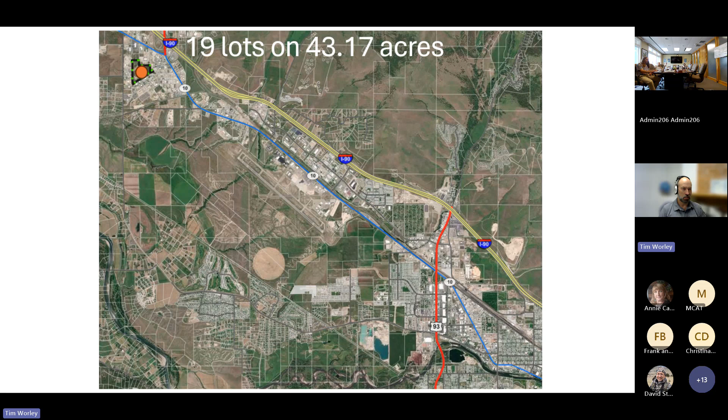All right, this is Grass Valley Industrial Subdivision. I'm Tim Worley with Planning, Development, and Sustainability. This is a 19-lot industrial subdivision proposal by Ethos Civil, representing Grass Valley Industrial Park, LLC. The subdivision is located in the Y. It's a 43-acre parcel, a 19-lot industrial subdivision, proposed in 2 phases. The zoning out here is Industrial Center Light, which includes light industrial, artisan, and limited commercial activities.

Some of the activities that you see out here at the Y in this general vicinity include warehousing, tool manufacturing, recycling, and fabrication. I'm going to go through the typical subdivision review criteria, starting with agriculture. This parcel did have somewhat of an agricultural history. The Y interchange began construction in the early 1970s, and since that time, this location's become increasingly light industrial in nature. This property has no surface water rights at present, and it's surrounded by light industrial and commercial uses.

There's a network of public and private roads in this location, kind of a mix. The proposal is to extend 2 roads and create 1 new road. All roads meet the 26-foot wide industrial standard. Moccasin Lane is one road that will be extended. Moccasin actually connects all the way out to Deschamps Lane, and this will provide a connection to Enterprise Way.

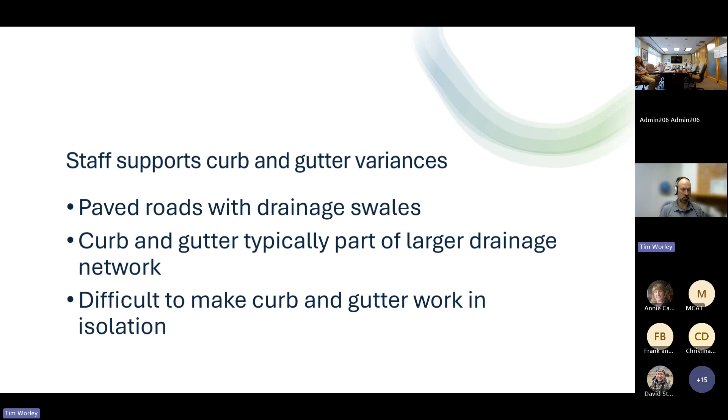Staff supports the curb and gutter variances. Curb and gutter are typically part of a larger drainage network, which is lacking in this general area. We felt it was difficult to make curb and gutter work in isolation. Now, Planning Board, in weighing in on these 4 variances, actually had a split vote, basically a 3-3 vote, which is a no recommendation vote, essentially. Their concern was that this was setting up substandard urban area infrastructure.

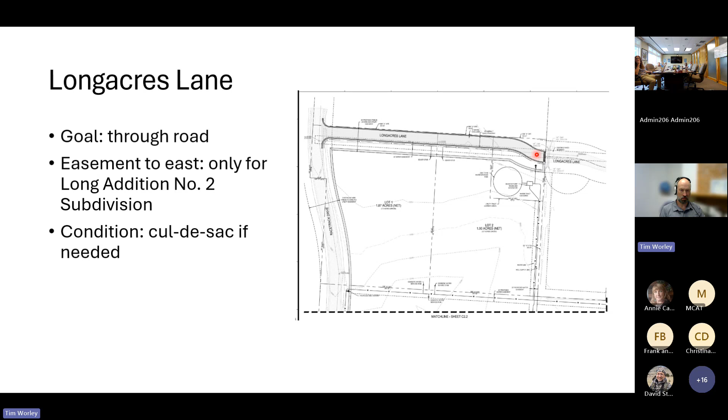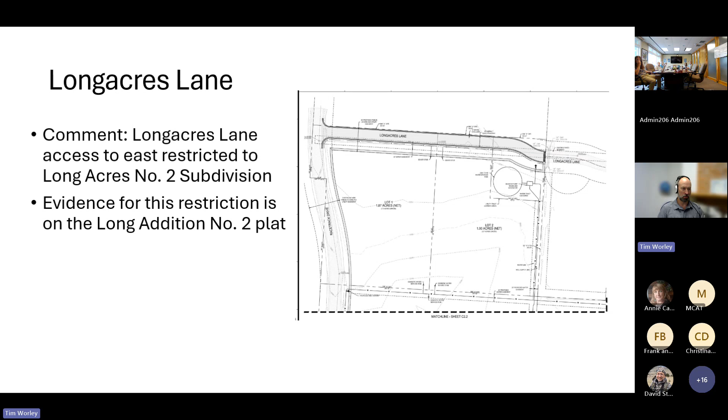Again, the issue here is that the Long Acres number 2 subdivision to the east has a limited use and scope as far as this private access easement. The use and scope is limited to the users within the subdivision itself.

Evidence for this restriction is on the Long Addition number 2 plat. There are a couple different lots along Enterprise Way that, if built upon at phase 1, can have access directly off Enterprise Way.

However, we have a condition that once this cul-de-sac road is constructed at phase 2, these 2 lots will have to get their access off of the cul-de-sac, which is called Ranger Road.

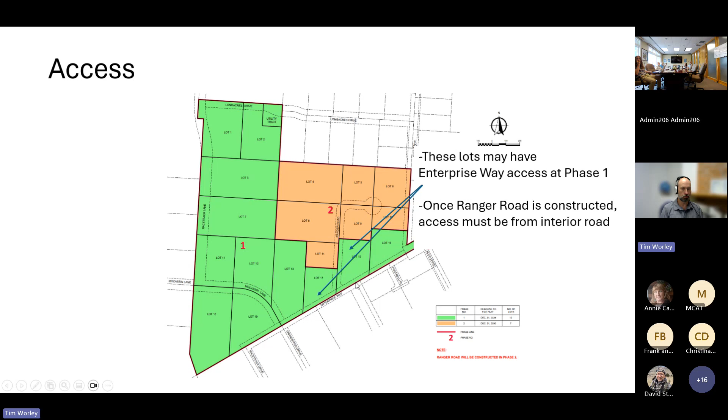There's a traffic impact study conducted for this subdivision that included review of impacts to West Broadway, Highway 93, and the interstate from this subdivision.

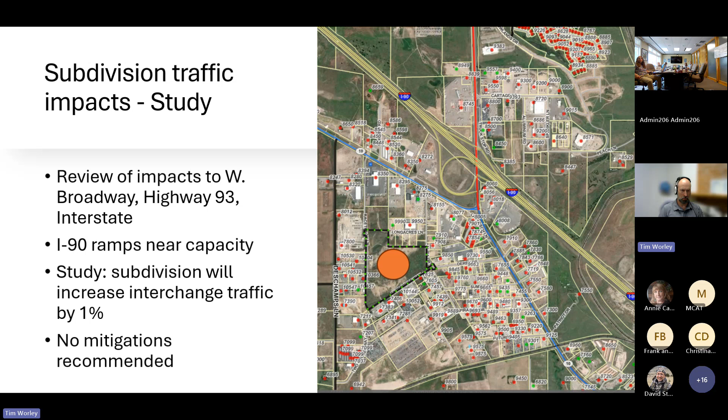It was concluded that the Interstate 90 ramps at the Y are near capacity at present, and that the subdivision will increase interchange traffic by about 1%. That's a small enough increase that no mitigations were recommended out of the study, and we have no conditions related to that.

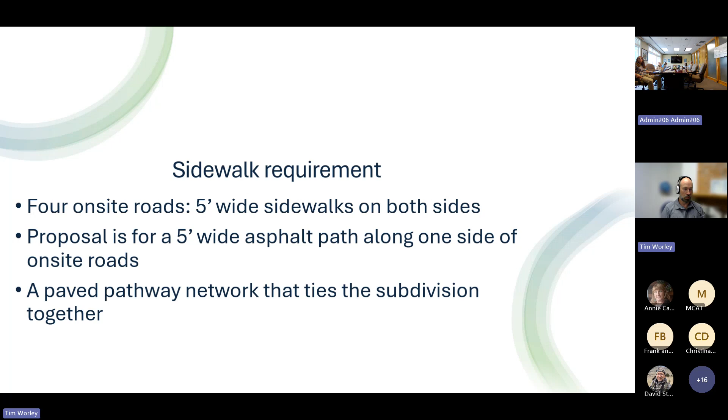5-foot wide sidewalks are required on all on-site roads. So again, we're talking about 4 different variances because what's requested in this case is a network of walkways that would be just on one side of the on-site roads. It's essentially a paved pathway network that ties the subdivision together.

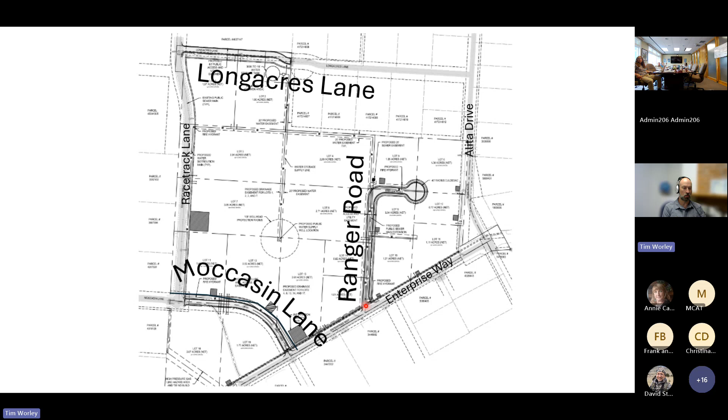I'll illustrate that starting up here on the north end on Longacres. The proposal is for 5-foot wide walkways along one side of all these on-site roads, including a stretch of Enterprise Way where a walkway isn't required, connecting all the way to Ranger Road, which would also have a walkway on just one side.

Staff is in support of 3 of the 4 pedestrian facility variances. We felt that road alignments make it difficult to meet the 2-walkway standard for both Longacres Lane and Racetrack Lane. We felt having walkways on both sides of on-site roads adds minimal function. In fact, it ends up serving subdivided lots on the opposite side of an on-site road in a way that doesn't really serve folks within the subdivision. So we felt there was an issue of proportionality that we needed to acknowledge.

Staff does recommend denial of 1 variance, and that's to allow pedestrian facilities on one side of the cul-de-sac road, Ranger Road. We felt it was fairly straightforward just to wrap a walkway along the opposite side of Ranger Road, just to have a continuous facility along that relatively short stretch of road. We didn't see any hardship with that.

With planning board, again, there were 6 members present at the July 6th hearing. All variance motions related to pedestrian facilities failed—they didn't get 1 affirmative vote, except they got 1 affirmative vote for 3 of the roadways in question. The board majority simply wanted to see the subdivision regulations standard affirmed, and they felt this was necessary infrastructure for an urban area industrial subdivision.

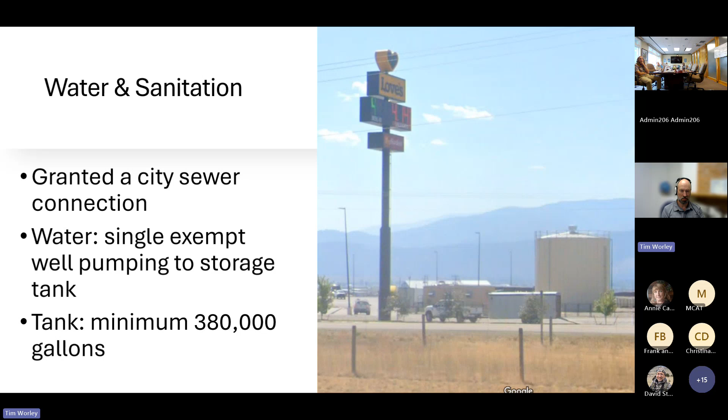It's proposed to be within a utility lot in phase 1. The water tank itself must comply with setbacks, so we have a condition essentially allowing the utility lot shape to change to meet zoning.

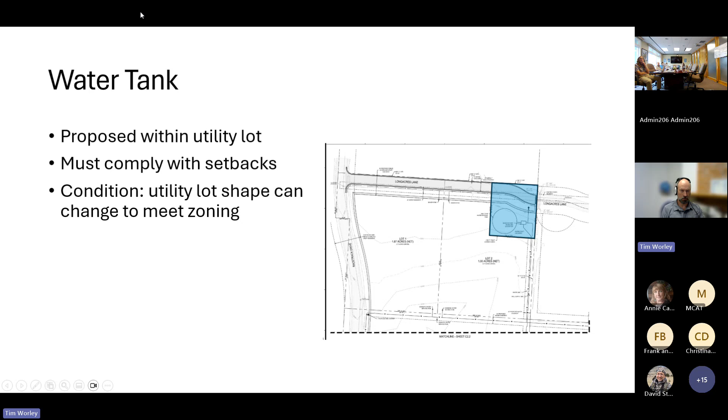Now the tank will be supplied by a single well, again exempt from water rights permitting. This applicant is working toward a water right, but as long as this is an exempt well, the output must remain under the 35 gallon per minute and 10 acre-foot threshold.

So we are recommending a condition requiring metering of well output as well as annual reporting of water usage within the subdivision, with the covenant spelling out the usage limitations.

It's noted that external watering sources may be necessary for things like landscaping, and that's something that's actually in the subdivision application. We think that probably won't be an issue initially. It would just be an issue if the subdivision built out fairly suddenly and all the water was spoken for in a fairly short period of time.

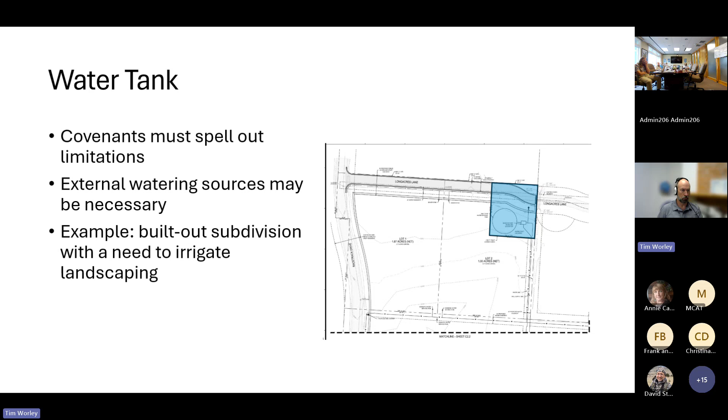So the water tank will supply potable water via mains to every lot, and that allows for fire hydrants to have essentially municipal fire flows.

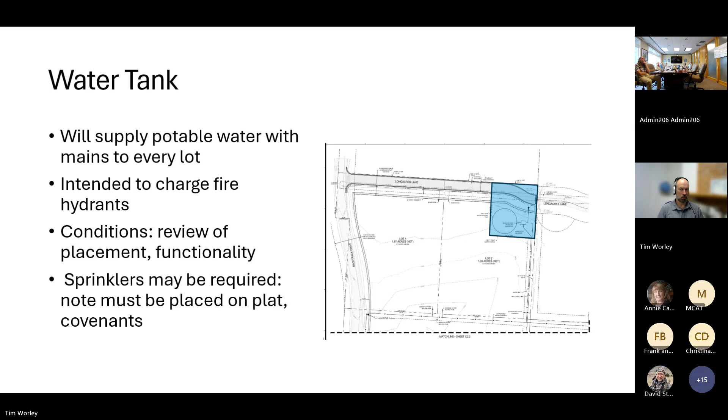Sprinklers may still be required depending on industrial uses on individual lots. So we do have a recommendation for that note to be on the plat to that effect, as well as an indication in the covenants.

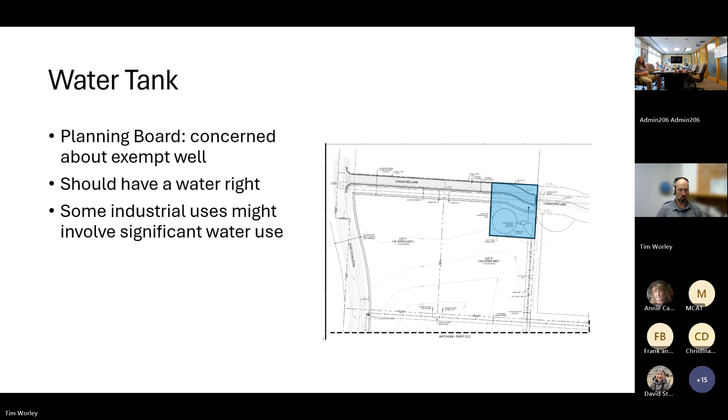Planning board expressed concern about the exempt well within the context of industrial uses. They felt that this project should have a water right immediately, and they were concerned that there might be, for instance, some excessive industrial user that might use enough volume that it isn't consistent with the exempt well assumptions baked into the project.

A geotechnical analysis was conducted on the property. The site does have fairly diverse characteristics. In some places you have fairly fast infiltration of water; in other places there's sort of a hard pan that restricts water infiltration. So per the geotechnical analysis recommendation, we're recommending a subsequent geotech analysis for each lot upon development.

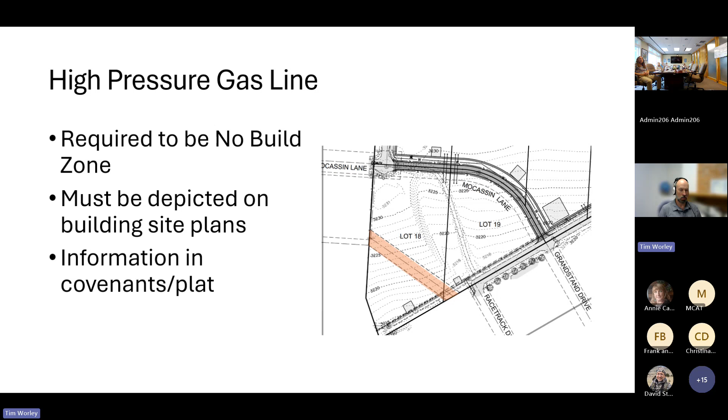There is a high pressure gas line that crosses a portion of lot 18. It's required to be a no-build zone. We're recommending that it be depicted on building site plans, with information about it included in the covenants and on the face of the plat.

We do have one condition, commissioners, that I would recommend a little bit of additional language for clarification. We are recommending an amendment section for the covenants that captures a lot of the issues important and directly related to the subdivision review criteria. But we wanted to make sure those sections could only be changed if the covenants are brought back before the county commission. That's what that additional language allows for.

So again, staff's recommendation was for subdivision approval. Planning board did not support the subdivision—I think there were 6 votes against recommending approval. They did support the industrial opportunities that would be provided by the subdivision, but they were concerned about the substandard infrastructure proposed. They felt that now is the time to make things like pedestrian connections, as opposed to waiting, and that a water right is more appropriate for an industrial subdivision rather than an exempt well situation.

So commissioners, I've got the motions bundled essentially in fours. You might remember curb and gutter affects four basically based on all the on-site roads, so there's four separate variances. And again, all those recommendations were kind of deadlocked, so to speak—these are non-recommendations per the 3-3 votes on the curb and gutter variances.

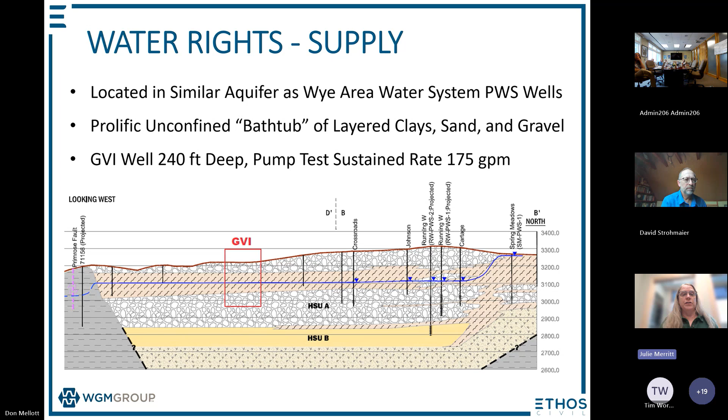So let's talk about the water demands next. This is specific to the GVI subdivision. The water needs for industrial and commercial uses are difficult to accurately predict because a wide range of activities can fall under these categories.

Historically in Montana, industrial use meant things like mining or wood products processing. These activities used up a lot of water. Uses typical in the Wye area today are warehouses, auto parts and repair shops, and small fabrication facilities. These businesses use a lot less water.

The volume of water needed for typical uses in the Wye area today is tied directly to the number of employees in each business and mainly consists of water for drinking and flushing toilets for those employees. To calculate an estimated water usage for GVI, we assumed that there would be one employee for every 800 square feet of building space and 13 gallons per day per employee, which is a DEQ standard.

This works out to, and forgive me, I'm going to throw a few numbers at you, so bear with me. This works out to an average of about 6 gallons per square foot per year, which is equal to about 0.45 acre feet per year. And with the 19 lots in GVI, that adds up to less than 10 acre feet.

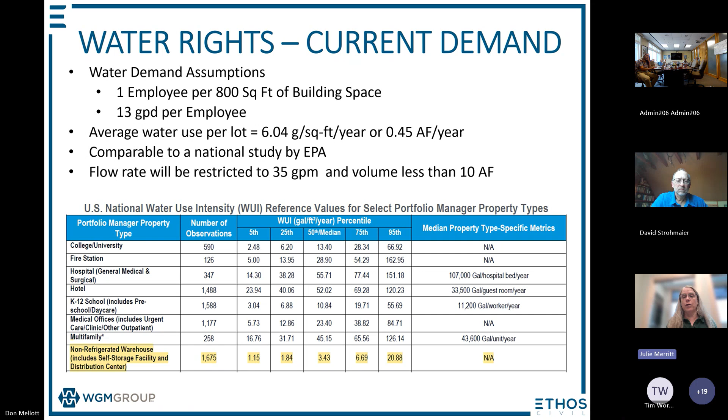This is comparable to a national study that was conducted by the EPA, where the median water use intensity for warehouse type businesses was about 3 gallons per square foot per year. And the 75th percentile measurement in that study was just under 7 gallons. So you can see that highlighted on the last row of the table in the slide. Our estimation at 6 gallons per square foot falls right within that measurement from the national study, and I think that provides support for the methodology that we use to estimate the water use for this subdivision.

And so since our estimated use for the lots in the GVI subdivision is less than 10 acre feet, we will plan to operate the well under an exemption. In the coming months, as the planned demands develop that exceed 10 acre feet, we will pursue a full water right permit.

For the use within the GVI subdivision, the flow from the well will be restricted to 35 gallons a minute. The large storage tank that has been mentioned that will be part of this system will make it possible to have a higher flow available for short periods of time to meet emergency needs. But that said, the flow rate from the well will not exceed 35 gallons a minute, even in emergency situations.

So, looking into the future, as the plans for the Wye area develop, it's helpful to know that this well is available to be part of a larger regional water supply. It has been constructed to the appropriate standards and is in a central location.

The pump tests show that this well could contribute a substantial portion of the flow rate and volume needed to meet future demands. And most importantly, we have already secured shares from the Grass Valley French Ditch Company to provide mitigation for future water right permitting.

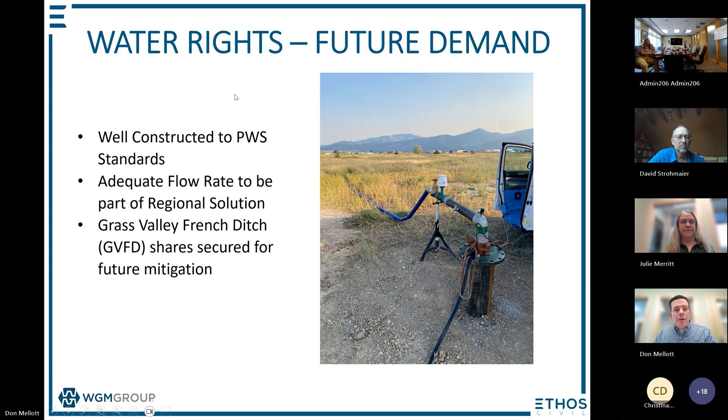Okay, I'll move through the rest of this fairly quickly to wrap us up.

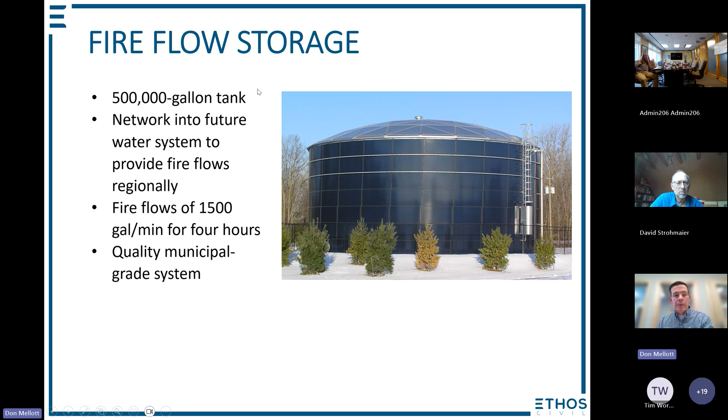Just wanted to give an overview of the water system beyond what Julie has described. We are looking at a 500,000 gallon tank for the project, up a bit from our original assumption, providing fire flows of 1,500 gallons per minute for 4 hours. And as Julie mentioned, this will be a municipal grade system, built to municipal standards.

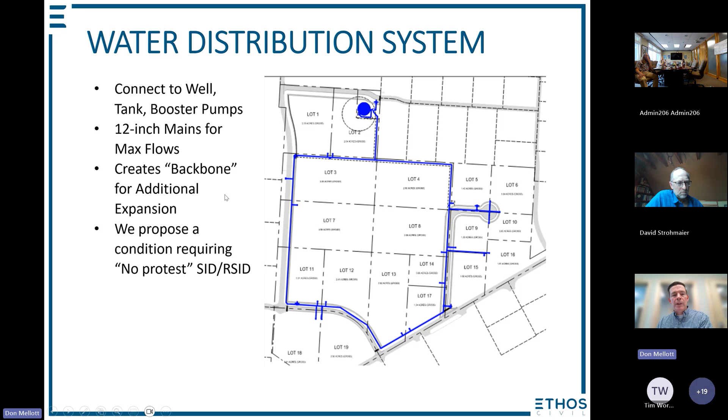Just a quick visual to show you what that network will look like, built out for the project with 12-inch mains that will provide great flow for not only this project, but potentially for connection in the future, creating that backbone. We will shortly here be proposing a condition, a no protest for an RSID, to show our commitment to allowing this system to be part of a region-wide system, should that occur.

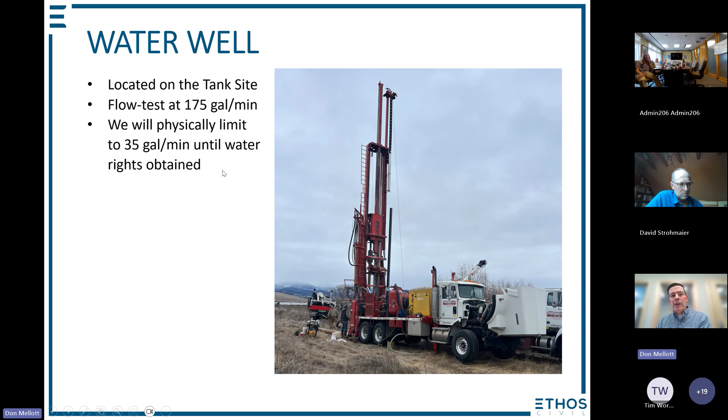Julie mentioned most of these things, but the well is being drilled, tested at 175 gallons a minute. We will restrict that to 35 gallons a minute until water rights are obtained.

And then wanted to talk briefly about some proposed modifications we have to the conditions of subdivision approval. These relate to water, so we'll just run through these relatively quickly. The first one is, as a result of our review here earlier this week, it became clear that we needed to make clear that we would restrict the withdrawal out of the well at 35 gallons a minute.

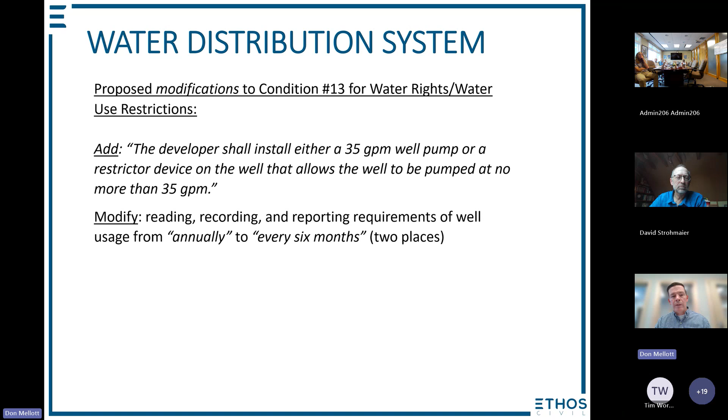So we're proposing to add to condition 13 that the developer shall install either a 35 gallon per minute well pump or a restrictor device on the well that allows the well to be pumped at no more than 35 GPMs. And then also to that same condition 13, we are willing to have the reading, recording, and reporting requirement be as often as every 6 months. That would be a change from the annual requirement shown in condition 13. We're willing to have maximum transparency on the usage out there, and we thought every 6 months would provide even more transparency on the usage from that well.

We wanted to propose 2 more conditions, altogether new conditions. This first one I'm calling condition 14. This relates particularly to the application for water rights. There was some question about timeline on water rights and a milestone for seeking water rights.

So we're proposing a condition that says the developer shall apply for water rights within 90 days of reaching measured annualized water usage above 5 acre-feet, and shall diligently pursue the same through the Department of Natural Resources and Conservation, DNRC. No additional building permits may be filed within the subdivision until application for water rights has been made to the DNRC after reaching 5 acre-feet of annualized usage. The point here is simply to create a milestone by which we would pursue the water rights and a means for the county to enforce that.

And then one additional condition related to the water system. We're proposing condition number 15. This relates to connection to future regional water systems, since there is considerable movement in that direction.

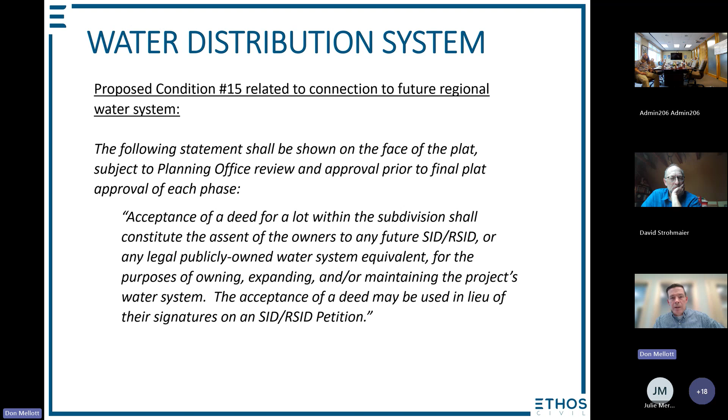Our proposed language is the following statement shall be shown on the face of the plat, subject to planning office review and approval prior to final plat approval of each phase: acceptance of a deed for a lot within the subdivision shall constitute the assent of the owners to any future SID, RSID, or any legal publicly owned water system equivalent for the purposes of owning, expanding, and or maintaining the project's water system. The acceptance of a deed may be used in lieu of their signatures on an SID, RSID petition. So just making it clear that we are willing to allow this to be part of a future regional system.

Very briefly, just wanted to hit on the variance requests, and since there was quite a bit of discussion about that at the planning board, I'll very quickly mention regarding the curb and gutter variance.

We are proposing stormwater swales adjacent to the roads, as Tim Worley described. We do believe that is far and away the best method of stormwater management out there, given the lack of downstream infrastructure. The introduction of curb and gutter actually makes that complicated because curb and gutter concentrates the flow, and when you concentrate the flow, it's harder to infiltrate the stormwater into the ground. We think that's a net negative and creates risks for downstream impacts.

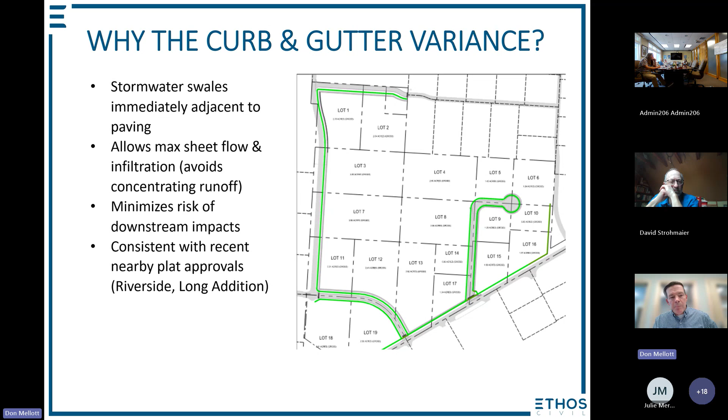So we're requesting the variance to not have the curb and gutter so that we can sheet flow into the roadside swales. This is consistent with the development patterns to the northeast, a recent plat approval there, as well as the recently approved Riverside plat that was just approved 2 years ago.

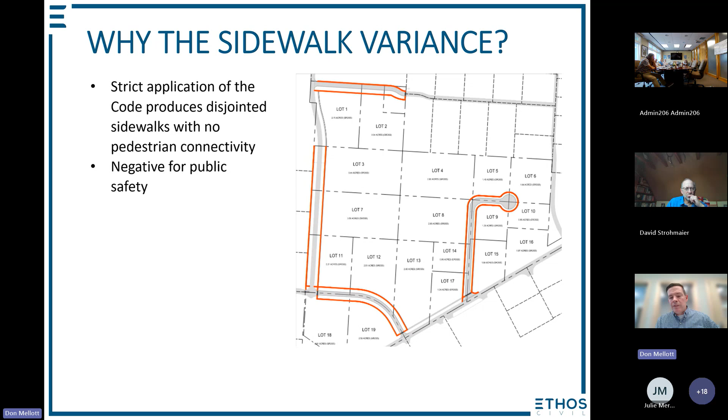So we are proposing sidewalks on a single side of the roads, and in lieu of putting sidewalks on both sides, we're offering to fill the gaps where the code does not require us to provide sidewalks. We think this fully interconnected pedestrian pathway is a far safer network for pedestrians and better accomplishes the county's objective for pedestrian safety.

This is consistent with recently approved projects in the area, both the Riverside and the Long Addition projects, where sidewalk was proposed on one side of both projects.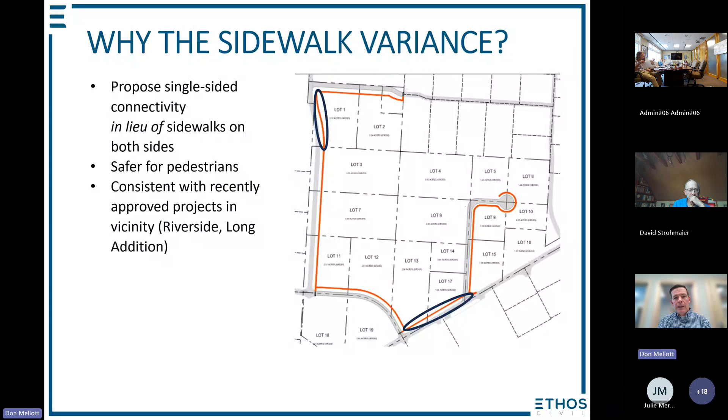This shows a bit of what Tim was describing earlier on the west side of Racetrack—just one example. You can see that if we were to put a sidewalk on that side of Racetrack Lane, it wouldn't serve any benefit for our project, would mitigate no impacts that we're creating. It would actually do relatively nothing for any of the adjacent properties either, because they receive their legal access off of Moccasin Lane and off of Dayshaw Lane.

This is just one example; the same could be said for Long Acres to the north as well. So we think that providing the full connected pedestrian pathway along the length of Racetrack is a much better option for pedestrians.

The last thing I'll bring up is that we understand staff is recommending denial of the variance for Ranger Road, for having sidewalk on Ranger Road. Part of that denial related to the lack of pedestrian access to lots 4, 8, and 14. We understand that comment, and as a result we'd offer a modification to extend the sidewalk the length of lot 5 so it provides a pedestrian connection to lot 4. We'd also offer a mid-block crossing on Ranger Road that provides access immediately to lot 8 and lot 14. We think that would mitigate the concern about pedestrian access to those three lots.

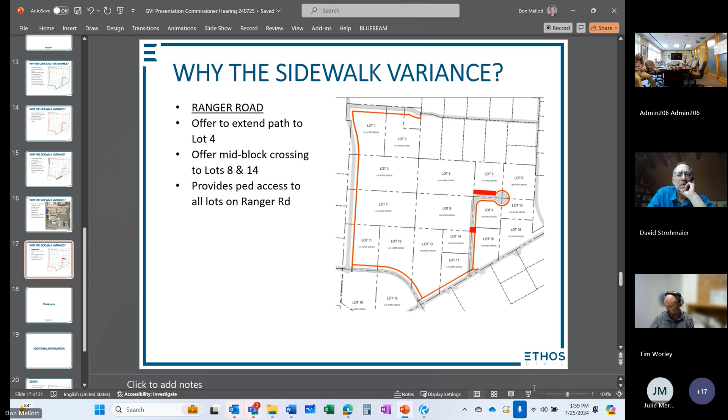So Tim, what's- Don, while Tim is collecting his thoughts on this image, could you describe again, Don, exactly what we are looking at by way of those larger red segments?

Yeah, this is a fairly new thought, and Tim is right, I've not mentioned this to him. Staff's recommendation was to have us provide sidewalk along the west side of Ranger and along the north side of Ranger, mainly to provide pedestrian access to all those lots on the west side, lots 4, 8, and 14. Our thought was to provide a mid-block crossing, essentially a full pedestrian connection over to the intersection near lots 8 and 14, then extend the sidewalk along the north portion of Ranger Road to reach lot 4. We thought that would accomplish the objective of pedestrian access to those lots.

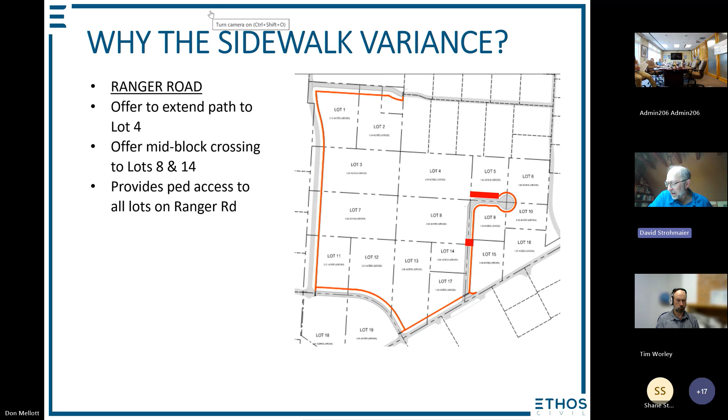Okay, thanks Shane. Josh, Juanita, additional questions? Yeah, I didn't quite understand the northern road connecting - is it called Longacre? And whether it could connect or couldn't connect - it can't connect, is that what I'm understanding? Tim, could you address that? Because it seems like the absolute worst in infrastructure planning to potentially end up with two cul-de-sacs that butt up against one another, and they have to drive around for emergency services to get to the other side. But I don't understand it.

Long Acres Lane now terminates there. You can turn if you go south on Alita and then west or right on Long Acres Lane. It terminates at present, and I think the developer of Long Addition number 2 - the subdivision with maybe 14 or 16 lots - specified at the time, before platting, that they wanted that stretch of road to be exclusively used by lots within that subdivision only. That's still their preference.

I think they just want lesser traffic. They're concerned about cut-through traffic, especially as the Y grows. That's a fear I heard from Jack McGillis, the person that commented - there's actually a comment attached to the staff report from Jack. Yeah, I was struggling trying to understand that comment.

So okay, so the folks on the far west - those are the ones cutting through and making kind of pioneer trails across the land already. And they're saying that if there's a connected road, there's going to be more of that. Maybe Don can explain.

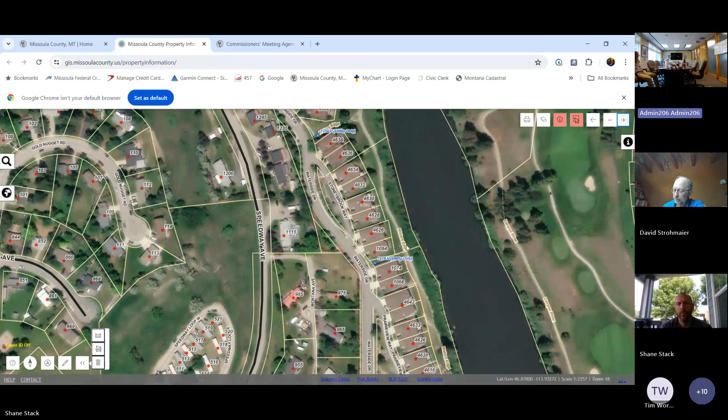In exchange for the HOA helping perfect those trail easements, Missoula County agreed to consider several things on Waterside Drive, including considering no parking on one side of the street — we didn't guarantee your votes. When Shane and I brought that MOA to you at your admin meeting within the last couple months, it might have been Commissioner Strohmaier or Commissioner Vero, or both of you, who said, well, why don't we do it now? Why don't we? Because the plan was to wait to do this if and when there was really a subdivision there and they would see an increase in traffic.

Okay, I like the trade-off for trail easements. Yeah, no, it was a very good collaborative agreement.

And Andrew Hers, the HOA president, is here with us today to correct whatever I've said that's not right or add additional context. But that's why we're here today — even though, and Andrew can correct me, I don't think parking today is a big problem on this street, it was envisioned that there would never be parking on one side of the street. We just figured, why not make it right now? We don't need to wait for this Aspire subdivision.

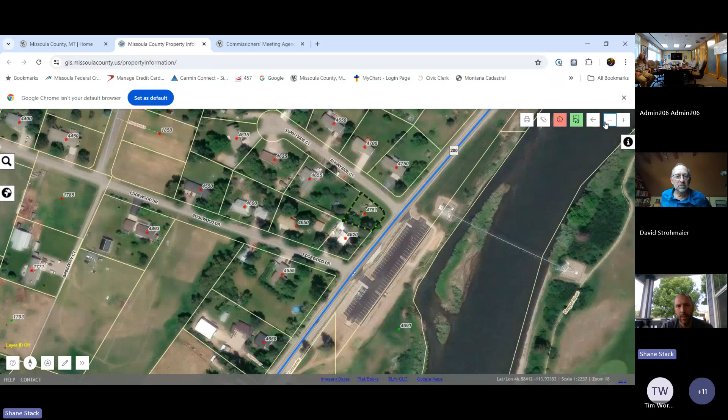This is the East Missoula area, Waterside Drive being here. And then if you just go to the north, we are looking at Sunnyside Court.

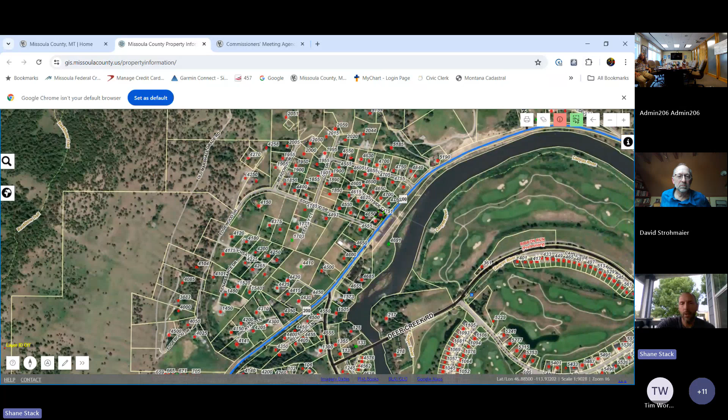The challenge we face, and this is just a short segment, it's basically the frontage on the south side of Sunnyside Court, just along property 4751. The Sunny Meadows Sewer and Water District owns this property. There is already a no parking restriction or resolution along Highway 200.

The reason the Sewer and Water District would like a no parking resolution on Sunnyside Court for this short distance is that DEQ has reached out to the district and highly recommended they avoid having vehicles park near or adjacent to this property because there is a well here, where water is pumped out of the ground to service the homes in the Sunny Meadows water and sewer district. So this is at the direction and request of DEQ to reduce the amount of vehicles in the area of the well. Granted, vehicles are driving by the well, but what they're trying to prevent is vehicles parked and leaking fluids, which could eventually infiltrate the well. That's kind of the background on it.

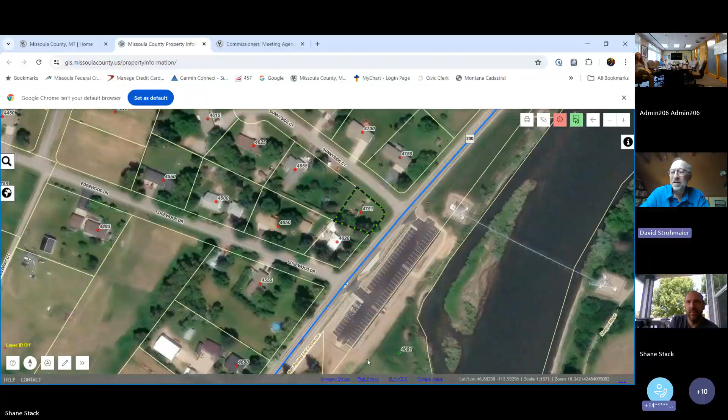Something tells me that every single person on Sunnyside Court would like to be included. Yes. We would like that parking on the highway issue to be addressed because we're almost hitting children, but that's a whole other issue than the parking lot and no parking resolution we passed. That's a different issue we can talk about in a different context. I don't want to talk about it anymore. I apologize. We just basically want to protect our water source and be able to assure that we're going to have clean, safe water, and that we don't end up losing the ability to pay for our own water.

So why don't we do this? This is what I propose. Shane, can you figure out the minimum no parking strip necessary to keep vehicles out of that 100-foot well isolation zone that Cindy Wenchel's referring to, and then work with Mike Tester to adjust the exhibit, and if additional length is necessary, you can contact the adjacent property owner.

Yeah, I can. We can figure out that length and then work with the property owner and make sure that they can either attend the next hearing or at least have a comment they can share, by email or letter. That sounds great, Shane. I can forward her information to you.

Okay, thank you, Cindy. You're welcome. Thank you, Sue, I see your hand. You've been patiently holding your hand up here. Go ahead.

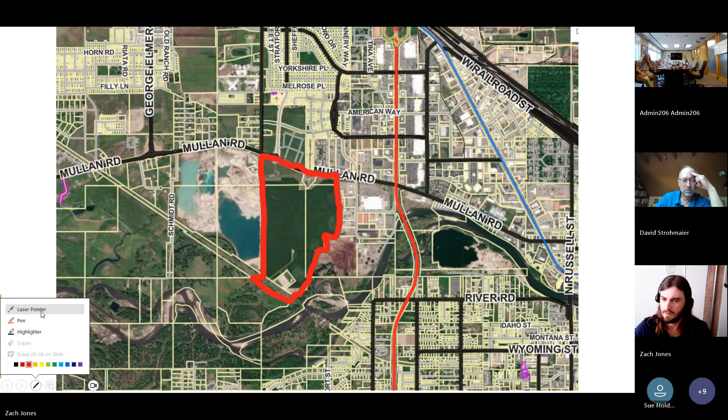So these are the 9 parcels or tracts of record included in this application. Currently there are 4 tracts located along Mullan Road, and then 5 more tracts farther south that are currently used for an agricultural use. There's a poplar farm there where the city actually leases the land for wastewater purposes. This tract here, where my cursor is, is actually a utility lot owned by Northwestern Energy, and that is not part of this application, so it will remain the same after this boundary line relocation.

And these tracts are actually remnants from railroad right-of-way. So the proposal is to relocate the boundary lines of these 9 tracts to create an additional parcel that can be accessed from Mullan Road. So instead of there being the 4 that are currently there off of Mullan, there would be 5. And then also to create a right-of-way parcel along Mullan Road, and you'll see in the next slide the proposed layout that is tract 9, which is to be dedicated to the city of Missoula for right-of-way along Mullan Road, presumably for some future improvements. And then also aggregation of any underlying unidentified tracts - those would be tracts that may exist from, usually it's section lines that are bisecting tracts, so those will be aggregated.

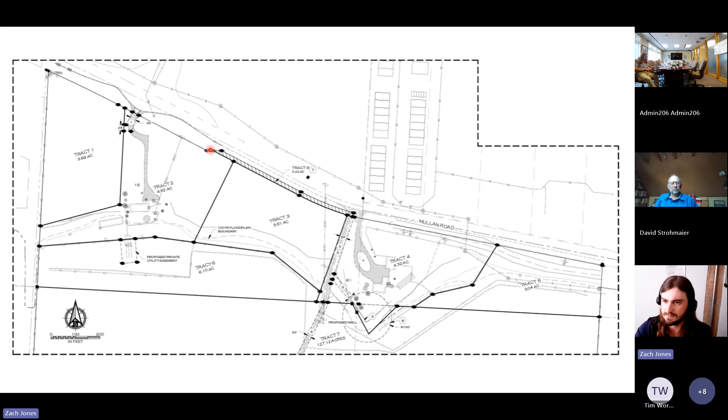So that is intended for future residential development. A little bit about some of the general evasion criteria and rebuttable presumptions that we review when looking at subdivision exemptions. The first of which is if the claimant is in the business of construction or dividing, developing, or selling land.

Dale Klaus, the property owner - I believe Klaus Properties LLC is actually listed as the owner, but he's involved with that LLC - is the president of Missoula Concrete Construction, and they specialize in construction of precast concrete on commercial projects. Now this boundary line relocation doesn't really have anything to do with any commercial projects, as it's zoned for residential development and intended for that. So that's not a criteria that we are considering to be for subdivision evasion.

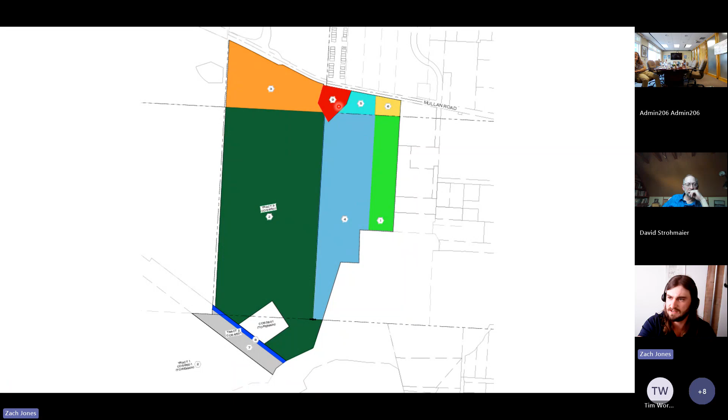There was also a boundary line relocation on one of the tracts, tract 9 of the existing tracts of record, described on COS 6158, and I can go back to show which one that was. So this current tract was created through boundary line relocation.

Another criteria is if the division will result in a pattern of development equivalent to a subdivision without local government review. So this division will result in 6 or more tracts, although calling it a division regarding the boundary line relocation is somewhat of a misnomer, because the boundary line relocation does not actually create any more tracts than are already there.

And we do not think that there is a development plan equivalent to a subdivision. It's really just kind of moving boundary lines to create one more lot that could be used for development along Mullan Road, and there already are several lots and houses that are there. It's not adjacent to any other platted subdivisions, and doesn't really contain any improvements or infrastructure that would often be associated with a subdivision.

So, on to a couple of agency comments. This one is from Matt Heimel, our county floodplain administrator. This is just a summary of the comment because it was very extensive, so the entire thing is in the staff report.

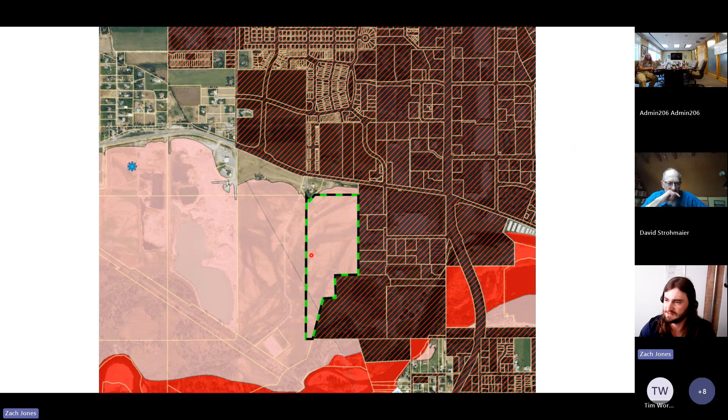This is the mapped floodplain showing where that was. I traced it on the proposed lot layout earlier, but just so you can see it a little more extensively - where it's located, this red and black cross-hatched area is actually just city land, so this is right at the border of the city and the county where it currently stands. This darker red color is actually floodway, which is closer to the Clark Fork River, and this is just the 100-year floodplain.

And another comment from the county clerk and recorder's office. One requirement for the right-of-way creation exemption is that there is a notarized document submitted that shows the purpose and acceptance of the right-of-way by the grantee.

So the city of Missoula would be the ones accepting this right-of-way. This document never arrived at the clerk and recorder's office, and it sounds like there may have been a bit of a mix-up from the city trying to submit that to the clerk and recorder's.

However, this same document would be required for actually recording the survey after this is approved, and when they go out and try to survey all the lines and file them, they would need it anyway. So approving this right-of-way exemption would not create a problem with the county subdivision regulations, as that would be required upon filing anyway.